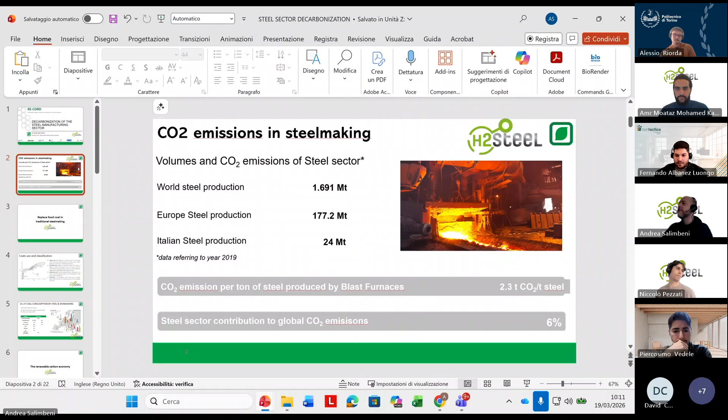Thanks, Fernando. I'm sharing my presentation. Let me know if you see the first slide in presentation mode. We can see it, but it's not in presentation mode. Okay. No? Can you see it moving, but not in presentation mode? Exactly, yeah. Just a second. Now? Yeah, still the same. Okay, now.

Yes, okay, perfect, great. So this is an introduction to the objective of the H2STEEL project, which is decarbonizing the steel sector. But it wants to be a very general lecture about the steel sector and how to decarbonize it, what are the main barriers. The intensive emission of CO2 derived from steelmaking is mainly related to the traditional steelmaking process, the one using blast furnaces and lots of coke and fossil coal used as reducing agent for transforming iron ore into iron metal.

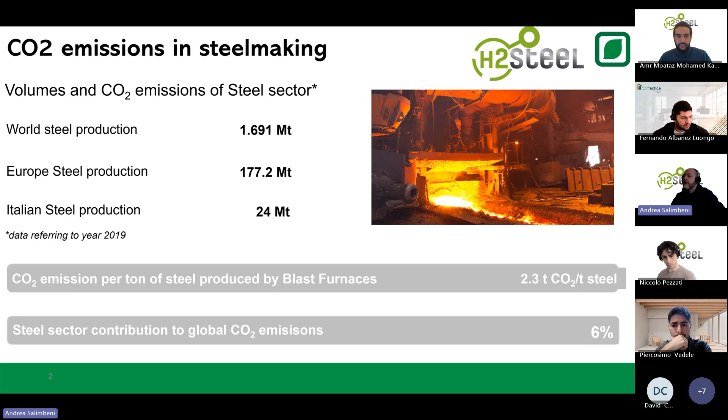So the average CO2 emission per ton of steel, which is in the range of 2.3 tons of CO2 per ton of steel, is mainly related to the traditional ironmaking and steelmaking process, where iron ore is injected together with coke in the tall blast furnaces to produce pig iron. Then we will see that there are already solutions and processes with lower carbon footprint, but they are still emerging and they do not fully avoid CO2 emission. So the primary source of CO2 in the steelmaking process is due to the use and consumption of fossil coal.

Fossil coal can be of different quality, and the Van Krevelen diagram is the best way to summarize different characteristics and quality of fossil coals. We go from the anthracite, so the highest rank coal, low volatile, high carbon, to the bituminous coal, this area, which is including coals of even higher volatility, up to the lignite class.

Lignite and peat represent fossil carbon sources which have not finalized the carbonification process, and that is why they are still volatile and not considered anymore as coal. So all these coals are used in the steelmaking process, but the coal and the anthracite are those really used. Anthracite is used mainly in the sintering process and as PCI. The coal is used both as a fuel and as a source of coke.

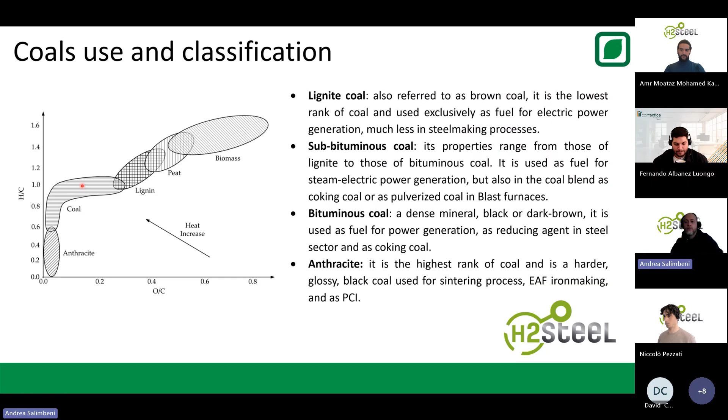Coking is the process where coal is pyrolyzed at 900 degrees to produce a particular high strength, low volatile coal material to be used in blast furnaces. So these are the coals that we need to replace if we want to decarbonize the steel sector. Just to give some idea, we did some studies based on literature and on Euracoal statistics.

The crude steel produced is in the range of 136 million tons per year in Europe. The total coal consumption is in the range of 56-60 million tons per year. As you can see, this column describes the traditional process and the new electric arc furnace based process.

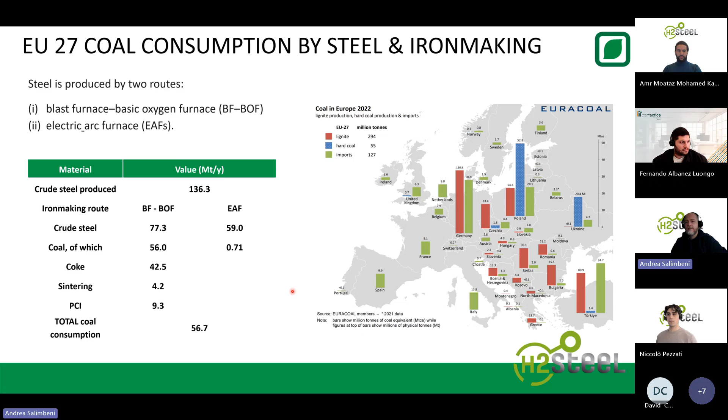The traditional process is the iron and steelmaking route, where the iron ore, so the mineral, is processed in blast furnaces with the consumption of coke and coal as a fuel to produce pig iron. And this is consuming most of the coal of the steel sector. The electric arc furnaces are used mainly to recycle steel scrap, so the consumption of coal is much less. But anyhow, we have as a target likely 50 million tons per year of coal to replace.

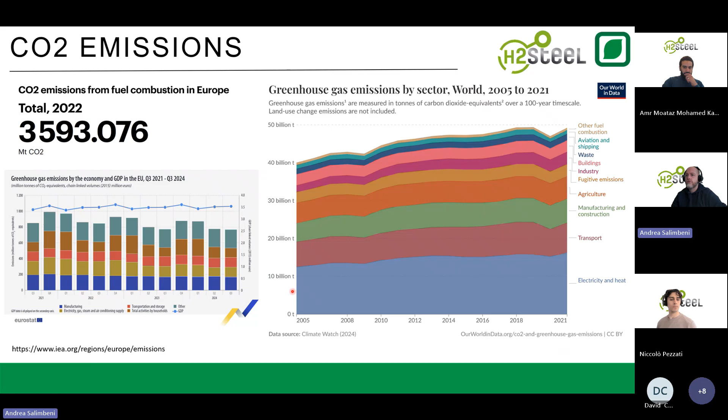Why do we need to replace that? Professor Chiaramonti already mentioned that, so I will go quite quickly. We have about 3 billion tons of CO2 emitted in Europe, and the steel sector and the industry sector are responsible for quite a lot of this share.

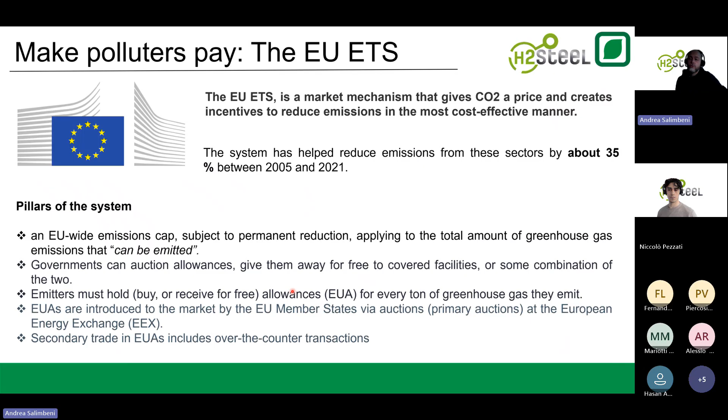Fortunately, we have a system named ETS, which is putting a price on CO2 in the form of credits to buy. So companies like steel companies have to buy CO2 certificates issued by the ETS program every year, and they have to buy 1 certificate per ton of CO2 they emit. Nowadays the price, this was last 2025, was in the range of 71 euro per ton. On average, we can say now it's in the range of 80, and we are going towards 100 in the next years.

Just to give an idea, the ETS generated about 43 billion euro revenues only in 2023, and we expect to generate even more in the next years when it will be extended to more sectors. Of course, this price on CO2 represents an issue for steel companies, as they have to pay likely an additional tax on their production process.

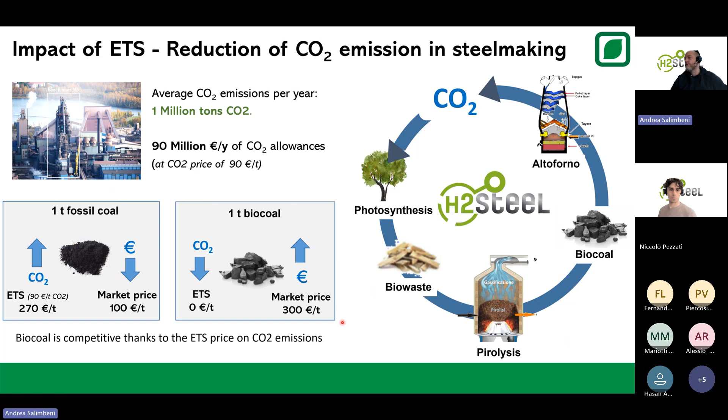And that is why biocoal compared to fossil coal can be a solution. Because if we replace fossil coal with biocoal, probably we can reduce the CO2 emission, and for companies, we can reduce the amount of certificates to buy. So the ETS is the way we have to make biocoal competitive with fossil coal. And basically the target of this project is to produce bio-based reducing agents for the steel sector to improve the economics and the sustainability.

So, as I was saying before, we have a traditional steelmaking and a more modern steelmaking process. Traditional steelmaking means we consume coal for everything. We have the blast furnace, which is our pig iron production unit. How the blast furnace works I will explain later, but just to give you an idea,

the consumption of coal is in the range of 700 kilo per ton of steel or hot metal produced, distributed as follows: the coke oven to produce coke, the pulverized coal to be injected, and the sintering process, which is needed to transform the mineral, the iron ore, into a feedstock suitable for the blast furnace.

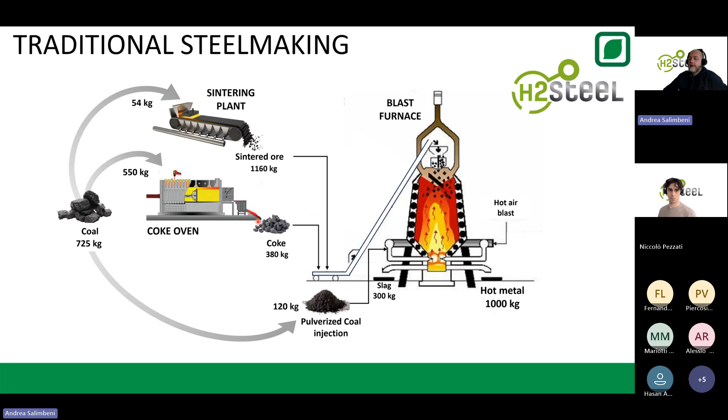So in a blast furnace, the consumption of coke is in the range of 300-350 kilo per ton of hot metal, while the coal injected as pulverized coal is in the range of 120 kilo per ton of hot metal, which is quite a lot. The pulverized coal injected has the role of producing CO, so that we enable the reduction of iron ore, iron oxide, into iron metal and CO2.

The coke has a double role of producing CO while gasifying, but also to maintain a porous layer between the iron ore which is injected in the furnace, so that the gas can pass through and the production of gas can enable the reduction of iron ore into iron.

To do that, the coal used is considered high quality coal, where the volatiles are quite low, between 10 and 20%, and the carbon content of the coal should be high. Between 65 and 80% is something that is acceptable. These are examples of coals commonly used in blast furnaces. These are the coals that we have to replace.

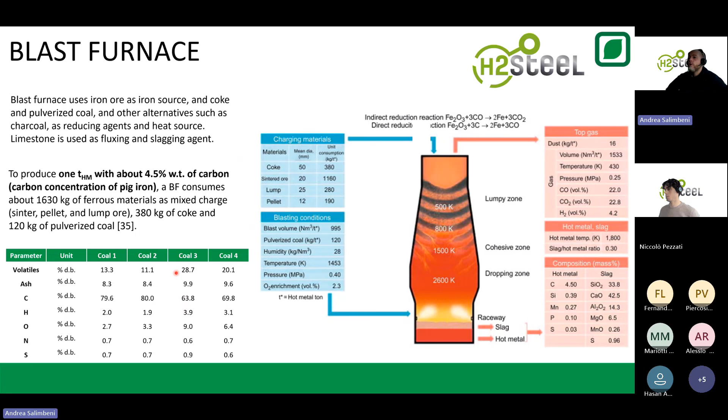The coke oven, I will be quick here, is a pyrolyzer of coal. In these reactors, the fossil coal, in particular vitrinite, is processed at 900 degrees for likely 19 or 24 hours in almost absence of oxygen. These are the chambers where the coal is charged, and these are the chambers where heat is produced by burning the gas.

In this case, at these conditions, the specific coking coal like vitrinite and liptinite becomes fluid and degrades, producing a highly porous, really strong carbon-rich material, which is named coke, which presents much more structural properties and compression strength and resistance than fossil coal. So these are the compositions of the coal used in a mixture to produce coke. As you can see, volatiles are higher compared to those of the coal used for injection.

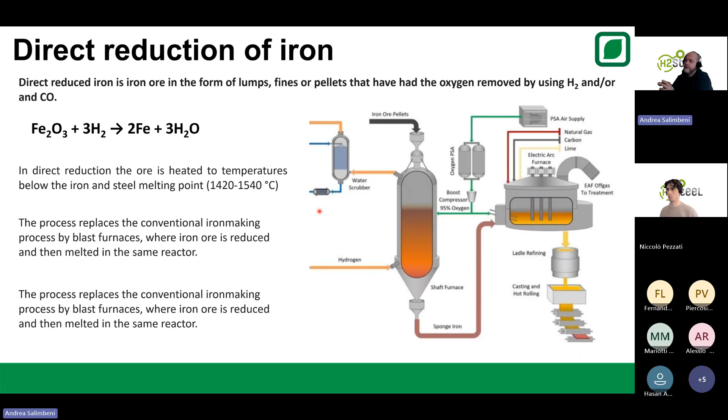And that is why after being reduced as a metal, it can go to the melting furnace, which is an electric arc or a submerged arc furnace, where the carbon is also added to produce the steel. That is the difference. So direct reduction of iron means decoupling the iron reduction from the iron melting, and it enables reducing the emissions, in particular when hydrogen is used. This is one of the last points.

Electric arc furnaces are used when the iron is already a metal. So they can be used with iron metal from direct reduction, or to remelt the steel scrap. The process is simple. An electric arc is used to give the energy to melt the material, the scrap or the reduced iron is melted, and the carbon, the coal, is added to adjust the carbon content in the hot metal, because it's always important to remember steel is an alloy of carbon and iron.

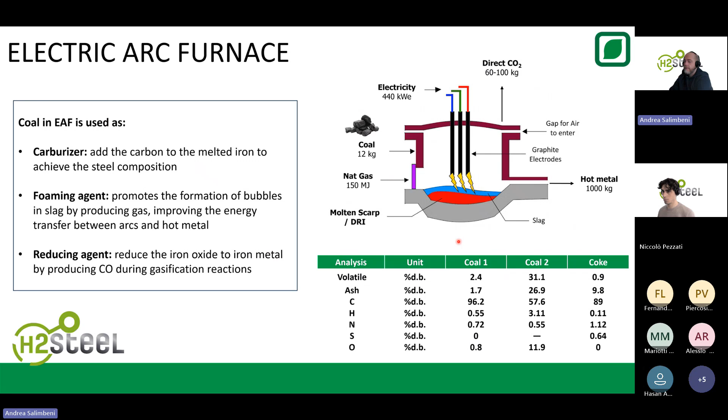And that is an example of the quality of the coal used in electric arc furnaces. It can be more or less volatile based on the specific target and the specific quality of the steel that we want to produce. So, what is the target? We need to produce a coal with reliable quality to replace the fossil one. So we have to produce something of low volatile content, high carbon content, and in particular, we need to avoid contaminants that are critical for the steel quality, like phosphorus, potassium, sodium, and sulfur.

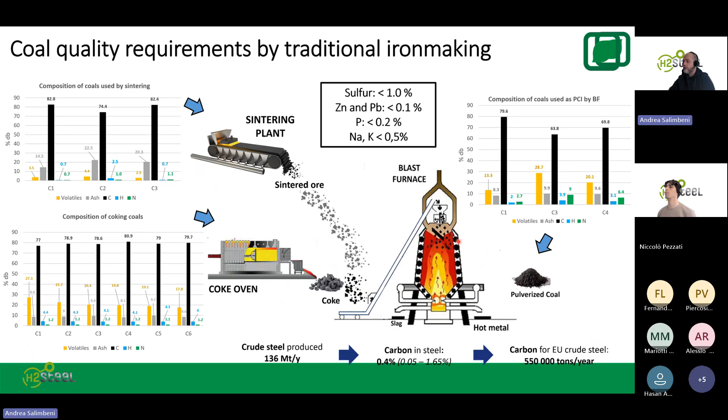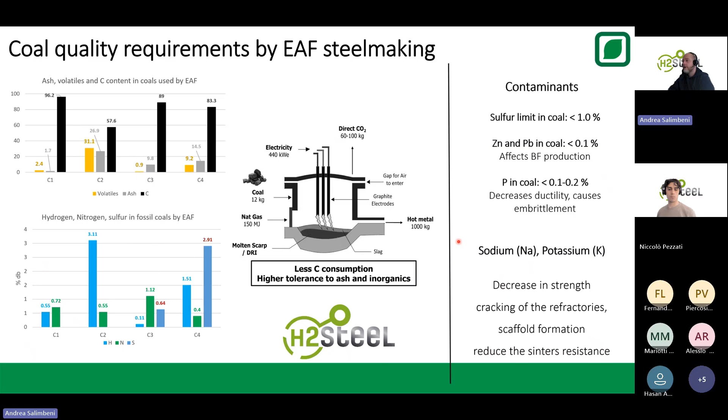That is our target. Do we want to decarbonize the steel sector? If we want to do that, we need to introduce new reducing agents like hydrogen and bio-based coal. And that is what H2STEEL is doing. Regarding the electric arc furnaces, the limits are the same. If we want high quality steel, we need to produce a coal alternative with low volatile, high carbon, and low contaminants: low sulfur, low phosphorus, low zinc, low lead.

So both in traditional steelmaking and in electric arc furnaces, carbon must be injected in different quantities, but it is needed as a carbon source in the alloy, in the steel. In traditional steelmaking, the blast furnace is equipment that cannot avoid much of the emission of CO2 because it cannot be integrated directly with hydrogen as a reducing agent, or only partially.

So biocoal can replace fossil coal in the coking process at a maximum of 15%, as a pulverized coal at 100%, and in sintering process the same. In electric arc furnaces, biocoal as well as the fossil coal can be used as 100% alternative as carburizer, as reducing agents, and as foaming agents.

So the conclusion of this presentation is we can replace fossil coal with biocoal. We can produce green hydrogen to be used in the DRI, and that is what H2STEEL is trying to do: combine the production of green hydrogen and biocoal for the steel sector.

Oh, great. So now I will really briefly introduce one of the technologies of the H2STEEL project, that is the methane catalytic pyrolysis or cracking or decomposition, different names for, at the end, the same reaction, with the goal of producing hydrogen and solid carbon. But before entering into the H2STEEL topics, let's do a brief theoretical lesson about the thermodynamics of the process and also the different kinds of technologies. So first of all, the thermodynamics behind the methane cracking.

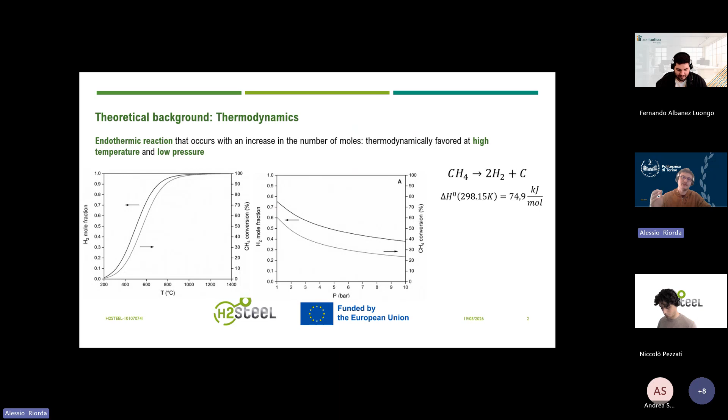And the second point is that during the reaction, we have also an increase of the moles, because you are going from 1 mole of methane up to 2 moles of hydrogen, so you are increasing the volume. It means that, of course, the pressure is avoiding the expansion of the gases. So if you have a higher pressure, your conversion will be lower. And this is clearly represented in the second plot of the slide, where with the higher pressure, you have a lower conversion. So, summarizing, we need to have higher temperature and lower pressure to have a good methane cracking reaction.

So which are instead the technologies that we can use to do that? First of all, we can divide the technologies into non-catalytic and catalytic cracking. With non-catalytic, of course, we have, as I said, to give the methane the energy to crack into hydrogen and solid carbon. And you can do it in a thermal way, just burning something, or electrical heating to heat up the methane and then crack the molecule. Or you can do that with other technologies like microwave or plasma. But these are just based on the thermal action, so the heat that you're giving to the material.

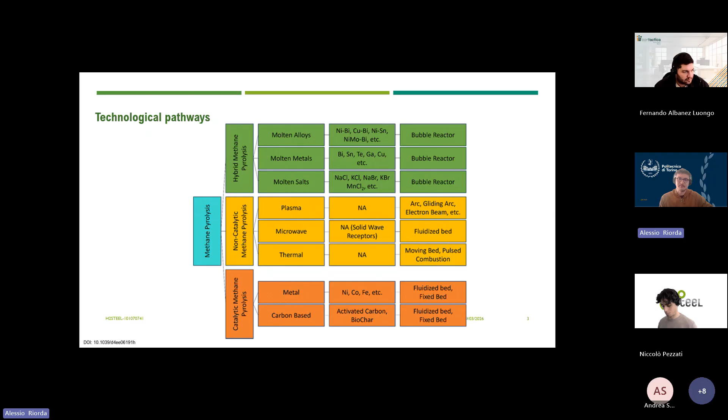Instead, if you want to use a catalytic process, you can use a catalyst to reduce the temperature needed for the cracking. In that case, you can use different kinds of catalysts, like metal catalysts, nickel, cobalt, iron, or a carbon-based catalyst, but we will see that later. Then there are also hybrid processes like molten metals or salts that have both actions, but these are not part of the presentation. Focusing on the catalytic cracking, as you can see here, you can have different metals. The most used in literature are iron, cobalt, and nickel. And you have also here an overview of the prices of the materials.

But the most important part is the first plot, where is represented the temperature range in which each of these catalysts or processes can work. For example, for the non-catalytic reaction, as I said, you need higher temperatures, going from 1,000 to over 1,600. Instead, if you're using a catalyst like carbon, iron, cobalt, you can decrease the temperature and obtain the same results. For example, the carbon one can work between 800 and 1,000, and nickel is the one with the lowest temperature because it's more efficient in the conversion, but at the same time it can have problems with temperature like sintering or something like that.

In the other two graphs that you can see here, that represented the conversion dependent on the temperature and also the stability of the catalyst. This is another good point that we will discuss in the next slide.

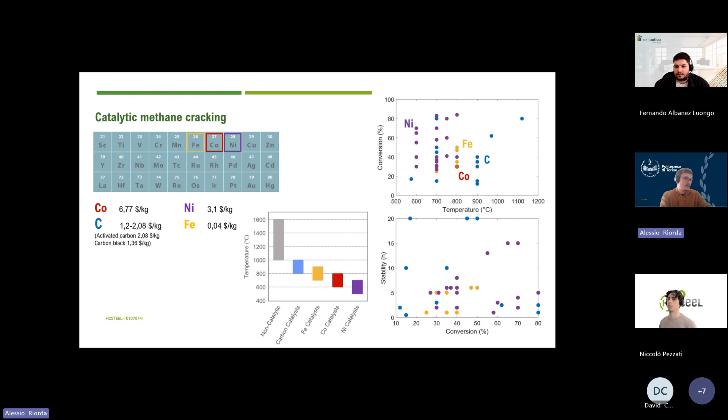Why? Because, as I said, the reaction is breaking the methane into gaseous hydrogen and solid carbon. And the solid carbon has to go somewhere. In this case, if you are doing a catalytic reaction, the solid carbon is depositing on the catalyst. And this is the process that leads to the deactivation of the catalyst, because when it's covered with solid carbon it is not working anymore as a catalyst.

This is not something new. The petrochemical industry has known that for a lot of years. Indeed, normally in the catalytic processes, like for the production of more gasoline from higher molecules of hydrocarbons, they normally burn off the carbon. So they take the catalyst, they burn off the carbon, and then it's regenerated and it can work again.

In this case, we don't want to do that, because the carbon that we are depositing on the catalyst can have a high value, and we can just use it and commercialize it. That's the point of the technology of methane cracking.

But which kind of carbon are we depositing? It strongly depends on the characteristics of the process. So it depends on if you're working with a catalyst or a thermal process, and if you're working with a catalyst, which kind of catalyst. For example, we have different kinds of carbon, like carbon black, just really small particles of carbon, or carbon nanotubes.

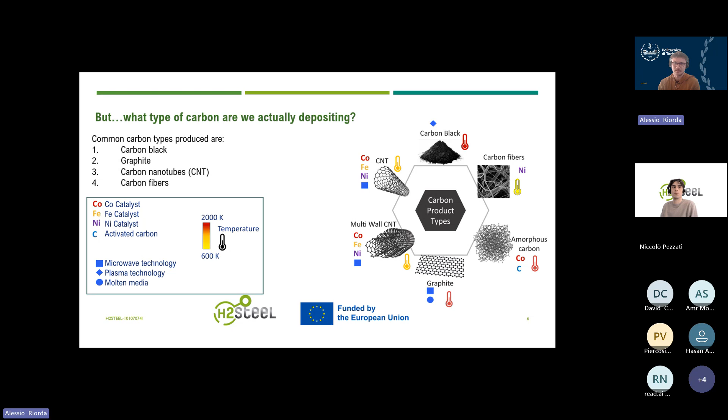So these tubes of carbon are generated normally with metal catalysts, because we have the deposition of the carbon on the catalyst, then the migration of the carbon inside the catalyst, and then deposition at the contact with the support, which generates these beautiful carbon nanotubes or fibers. And also the temperature is helping the generation of one of these types of carbon deposited.

But another question that you can think about is, okay, but is there demand for all of this carbon? Here, just a brief example. We had more or less in 2023, 97 million tons of hydrogen demand worldwide. And if we think about producing this hydrogen with the methane cracking process, we will need 386 million tons of methane. That's okay, but then we will produce 289 million tons of carbon. That's a lot, of course.

But how much? If you see the graph here, you can notice that the produced carbon compared to the demand for carbon nanotubes, carbon fibers, or carbon black is really high. So the result of this simple example is just to say, okay, maybe we cannot produce all the hydrogen with this process, but it can be part of the solution.

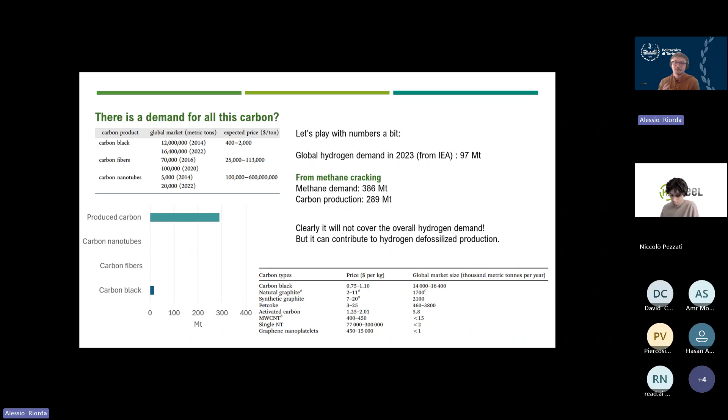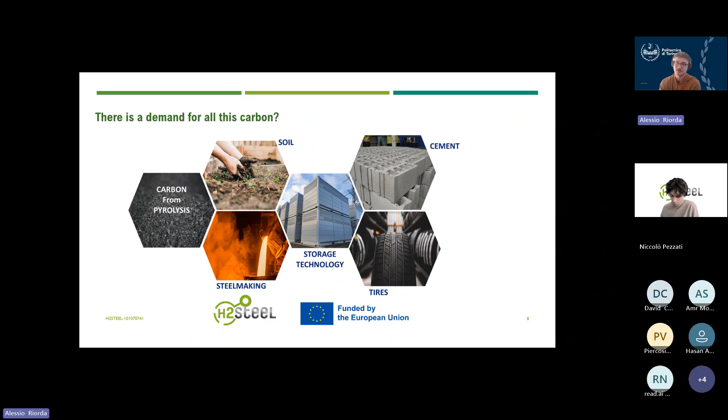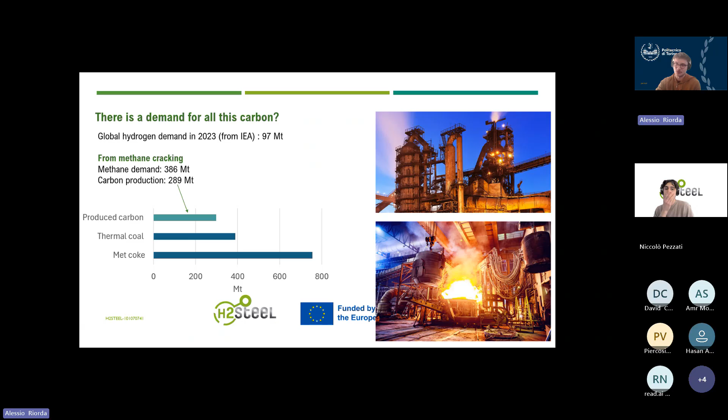Of course, it depends strongly on the type of carbon that you need and what we can put in these industrial processes. But it's just to say that carbon nanotubes and so on are not the only demand for carbon that we have in industry.

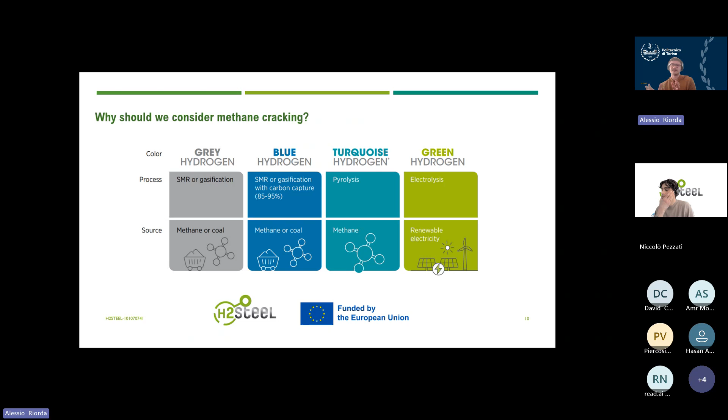And just to conclude, let's see a comparison between different hydrogen production routes. Here you can see some of them. Normally gray hydrogen is produced with steam methane reforming. And the point of this slide is to say, okay, for producing 1 kilogram of hydrogen, you will need 2 kilograms of methane. And the energy requirement will be 6 kilowatt-hours per kilogram of hydrogen produced.

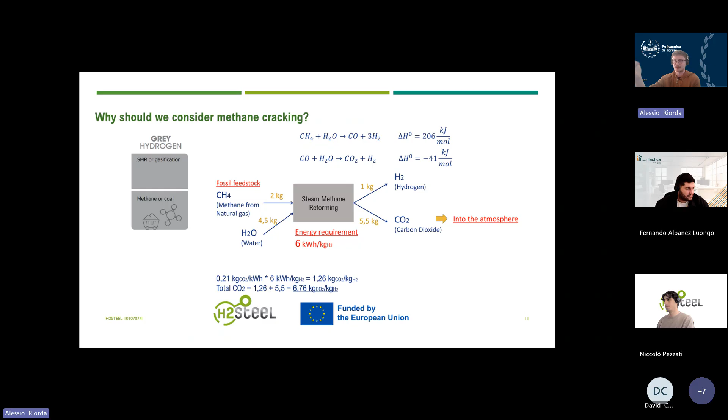And this will lead to CO2 emissions, not only the ones related to the energy requirement, but also because we have carbon in the feedstock, and so you will transform it, of course, into CO2 that goes into the atmosphere. One solution that we can see today is water electrolysis.

That is, of course, an interesting solution, because we are starting from a non-carbon feedstock, and you can obtain 1 kilogram of hydrogen from more or less 9 kilograms of water. It will require a lot of energy, and if this energy is not from renewables, that will lead again to the emission of a good amount of CO2, as you can see at the end of this slide.

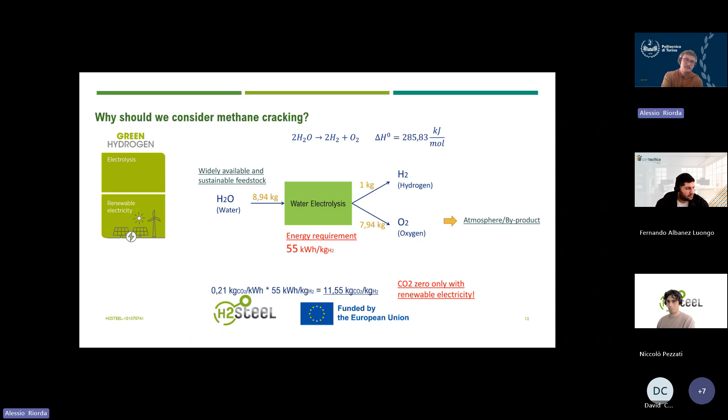But if it's completely renewable, you can decrease this CO2 amount to zero. Are there any other solutions? Yes, the one that I presented now is an interesting one, because differently from steam methane reforming, you are starting from more methane, 4 kilograms for every kilo of hydrogen, but then the carbon that you are producing is not in a CO2 form, is not going into the atmosphere, and you do not require technology to separate it and then put it somewhere.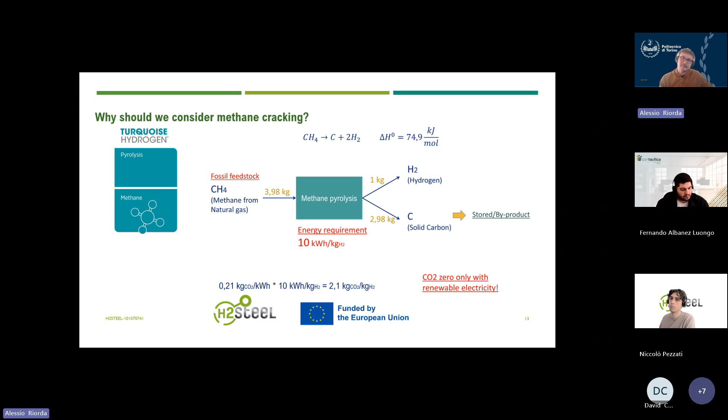You have just solid carbon, and you can store it or use it as a byproduct, as we said before. The energy requirement is lower than electrolysis, and if you again use just renewable electricity, you can decrease to zero the CO2 emission from this kind of technology. So this is just an overview of why we are talking about methane cracking, and later my colleagues will show you a more specific discussion about what we are working on in H2STEEL.

So without further ado, I will go deeper into the fantastic world of catalytic methane pyrolysis through carbon-based catalysts. Alessio was really complete in his presentation, so I will move really fast in this part. Nowadays, hydrogen is mainly produced through steam methane reforming, which is the most pollutant technique, but at the same time the cheapest one. The demand of hydrogen will progressively increase over the next 25 years in all the scenarios. At the same time, we will have a decrease in the request of hydrogen produced through steam methane reforming. Water electrolysis could represent only a long-term solution, because the energetic cost is really high.

For this reason, a mid-term solution could be represented by methane decomposition, which consists in the decomposition of the methane molecule into solid carbon and gaseous hydrogen. The main advantages of this process are the production of highly pure hydrogen, which of course depends also on the conversion of the reaction, the absence of CO2 removal stages, and an easy way to store the carbon produced. The main disadvantages are related to the high stability of the methane molecule. It is an endothermic reaction requiring high temperatures and high energetic demand, and it has a lower hydrogen to methane yield compared to state-of-the-art competitors, like steam methane reforming.

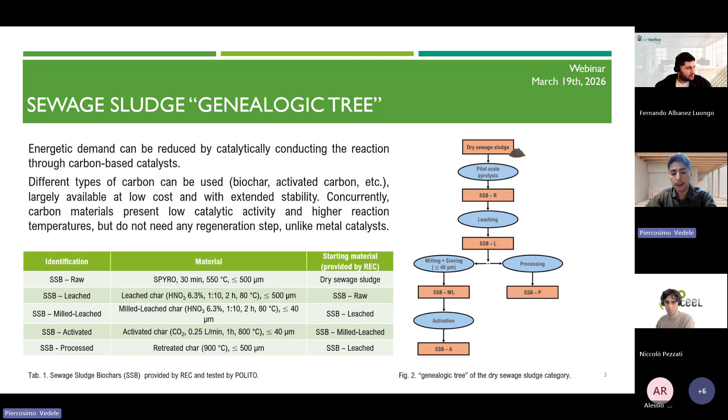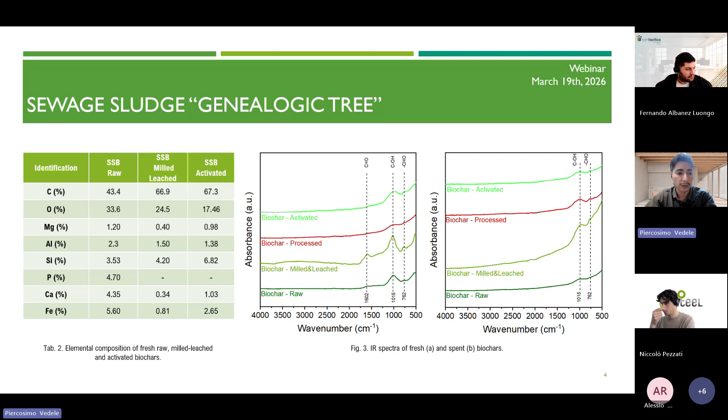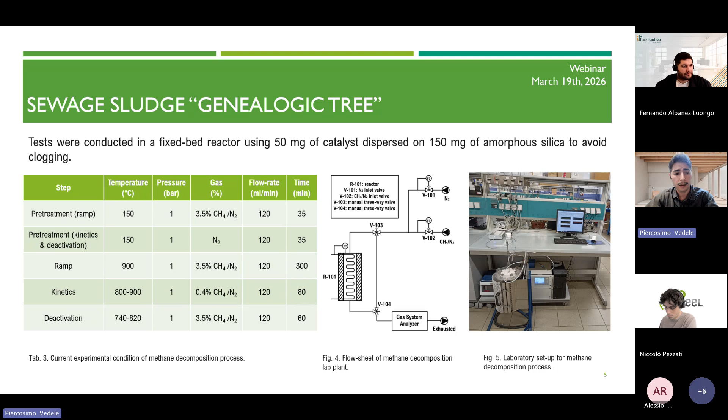But let's go deeper into the test phase. On the right, you can see the lab test bench that we use for conducting our tests. All the tests were conducted in a fixed bed using a fixed amount of catalyst and a fixed amount of an inert, amorphous silica, to avoid clogging of the reactor caused by carbon deposition. We can conduct three different kinds of tests: a ramp test to evaluate the best of the 5 biochars we are considering, so a screening of the biochars, and kinetic and deactivation tests to get the kinetic and deactivation parameters. All the tests were preceded by a pretreatment phase to ensure the dehumidification of the catalyst.

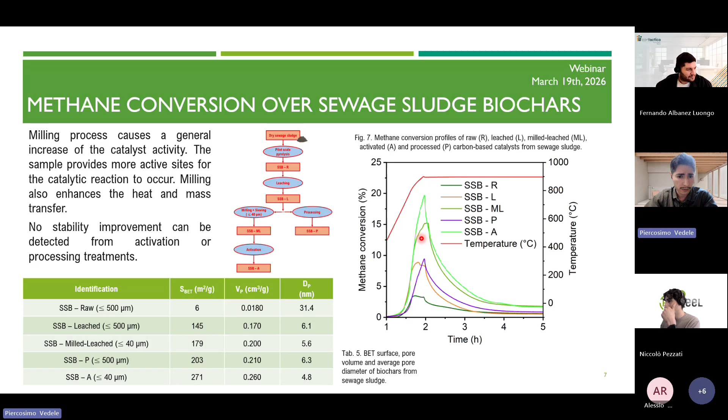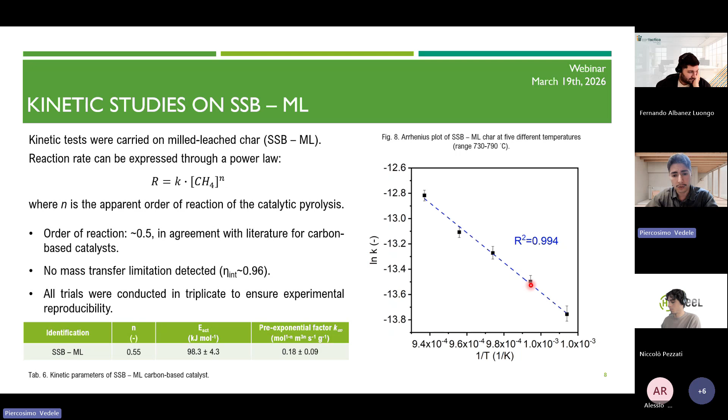And in particular, I want to point out that all the tests were conducted at low temperature for two important reasons. The first is that we want to ensure a gradient-less system, which works in all its length in the same way, and at the same time we want to skip the mass transfer limitation of the system.

And the same thing was done also for the deactivation studies, which were conducted at low temperature, again to ensure that we are in a kinetic regime. We used this kind of equation to fit the activity of our catalyst all along the time, activity which depends on the deactivation constant, Kd, m, which represents the dependence of the activity on the methane concentration, and D, which represents the order of the deactivation.

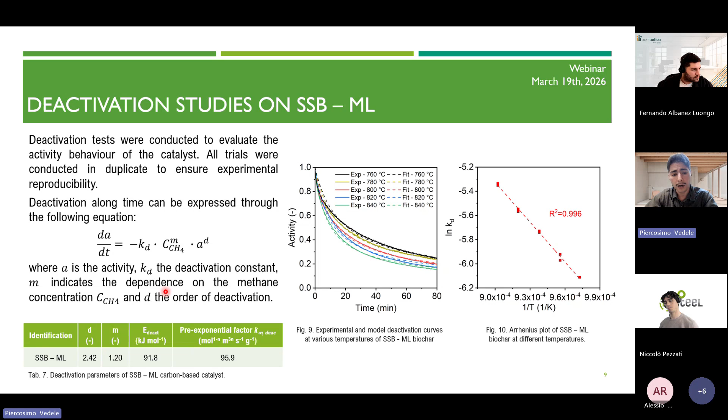All the tests again were conducted in duplo in order to ensure the experimental reproducibility, and in this way we were able to get the activation energy of the deactivation, which is close to 92, which is really close to that of reaction, and it indicates that the deactivation of this kind of carbon-based catalyst depends only on the amount of carbon deposited on our catalyst, and not on the quality of the carbon deposited.

These kinds of results were useful for the modeling of our fixed bed reactor. By solving through MATLAB this partial differential equation, we were able to get the profile of the methane conversion all along the time and all along the length of our reactor.

Here you can see the main characteristics of the reactor, and from here you can see that our model is able to fit quite well the experimental results that we obtained from our test conducted at 820 Celsius degrees. Of course, the model takes into account also the change in density and the change in particle size,

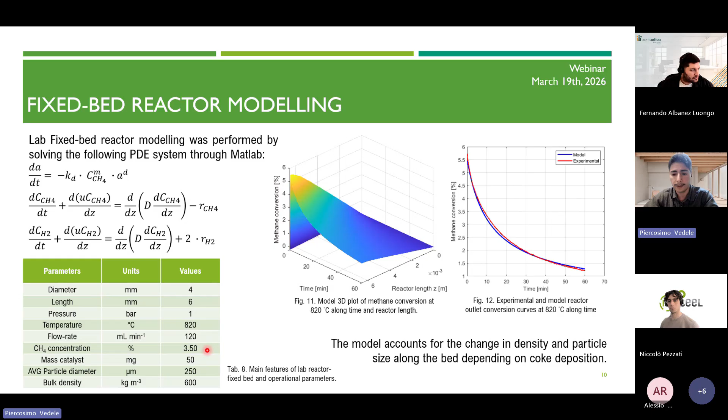which is related to the deposition of the carbon, but of course the conversions are really small, and also the methane concentration is really small, so the amount of carbon deposited is low, and we don't have a huge change in density and particle size, but it is taken into account.

Those results were useful also for a simulation of a new kind of reactor for conducting this kind of reaction, a moving bed, where gas and solid are sent to the reactor countercurrently.

Here I only show a sensitivity study where you can see that by changing the residence time of the catalyst inside our reactor, we were able to reach different kinds of conversion. Of course, by increasing the catalyst residence time, we are reducing the methane conversion, because the catalyst is characterized by lower activities, but at the same time we are also increasing the amount of carbon deposited on the catalyst itself. Maybe here you can see this reasoning better.

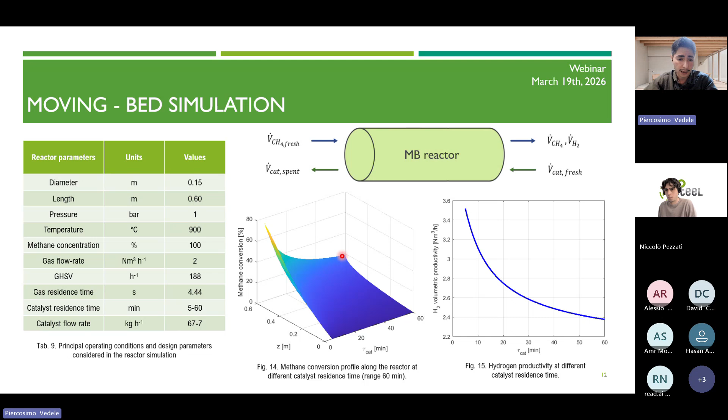So at low catalyst residence time, we have higher conversion, but of course this kind of reactor characterized by really low residence time is not so easy to manage. By increasing the catalyst residence time, we are reducing the methane conversion, but we also have a reactor which is easier to manage. Of course, this kind of technical study must be coupled with an economic study to evaluate which is the best trade-off from the point of view of the technical issues and the economic issues.

So, in conclusion, we tested several biochars from the family of the sewage sludge, which were subjected to different upgrading processes. The leaching, the milling and the activation, of course, increase the activity of our catalyst. In particular, the activation only slightly increases the activity of our catalyst. For this reason, we decided to proceed with our further study with the milled leached one, because it represents the best compromise between performance, cost, and environmental impact of the upgrading.

From the kinetic tests, we observe a reaction order and an activation energy which are quite in agreement with those of the literature, and the deactivation energy is close to that of activation energy. That indicates that the deactivation profile is influenced only by the carbon yield, the amount of carbon deposited, and not by the pyrolytic nature of the carbon deposited.

Those results were useful not only to simulate our fixed bed reactor, but also to make a simulation of a moving bed reactor, which represents the best way to scale up this kind of process, and which elucidates the differences in terms of performance depending on the residence time of the catalyst inside our reactor.

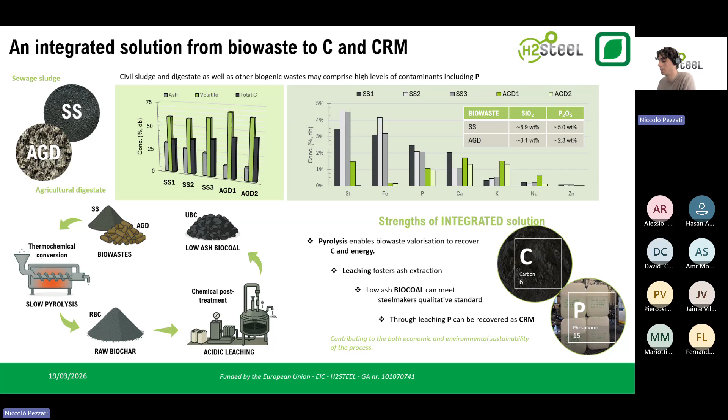So the first stage of this integrated process is the slow pyrolysis that we carried out at a pilot scale here at RE-CORD, and for which we have first optimized the conversion conditions at a laboratory scale, and afterwards we have replicated those in the pilot unit. So the parameters that we have focused on are temperature, the residence time, and the heating rate of the conversion chamber.

So we have converted both the biowaste streams at 550 degrees Celsius with a residence time in the conversion chamber not overcoming 1 hour, and fixed heating rates of 20 degrees Celsius per minute, which is typical for slow pyrolysis processes.

The output of this conversion, of course, is focusing on the yields on the solid products, so the raw biochar, which we can obtain from the thermochemical conversion. And as you can see here, when processing the sewage sludge, the solid yield is slightly higher than when processing the agricultural digestate. So we have 51% solid yield against 39% solid yield, as you can see in the pie charts.

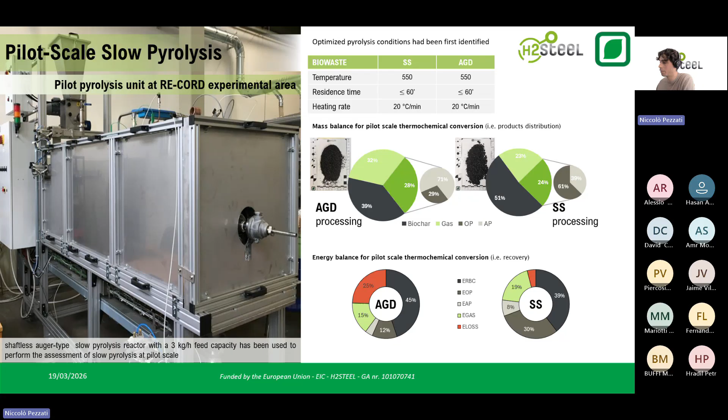So the two biochars that were produced, as I have just described, were also characterized. And here I want to draw the attention to the key aspects of the slow pyrolysis outputs. So first of all, the thermal treatment allows to reduce the volatile matter in the solids, going below the 20% threshold, so we can eventually see a 16% volatile matter content in the raw biochar from the sewage sludge, and a 13% volatile content in the raw biochar from the agricultural digestate.

The most relevant aspect here, though, is the increase of the ash content. In particular, in the case of processing the sewage sludge, we almost touch 60% ash content in the raw biochar, which is a shortcoming of this first stage, but which we can fix later through the chemical leaching.

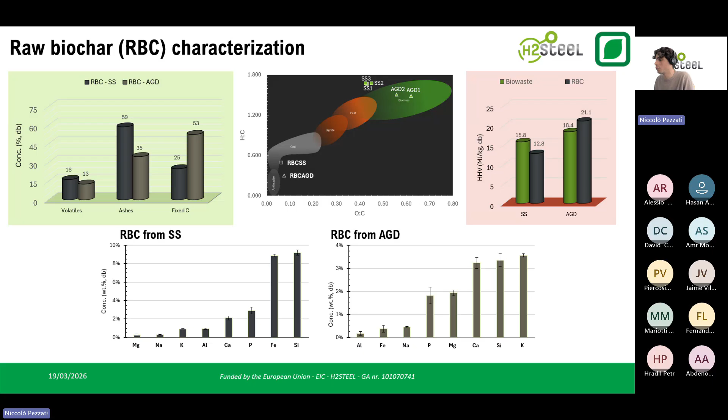And also here I reported the characterization, so the elemental profile of the two biochars. So focusing on the silicon, the phosphorus, the iron, which particularly in the case of the treatment of the sewage sludge reach very high concentration levels. As you can see, silicon in the raw biochar from the sewage sludge is almost 10%, as well as iron. Phosphorus in both the raw biochars is instead around 2%. And this is important because we want to recover it later.

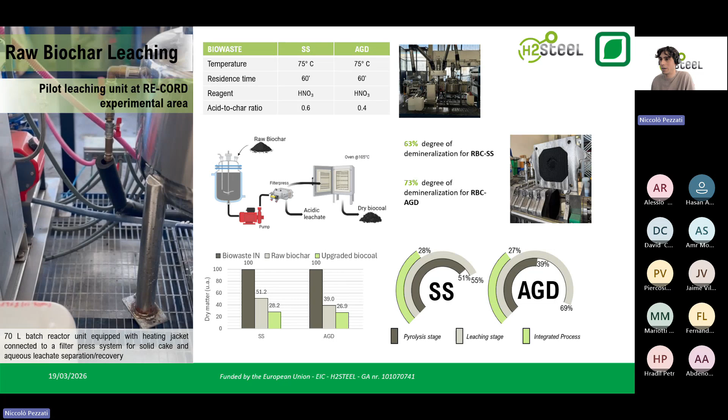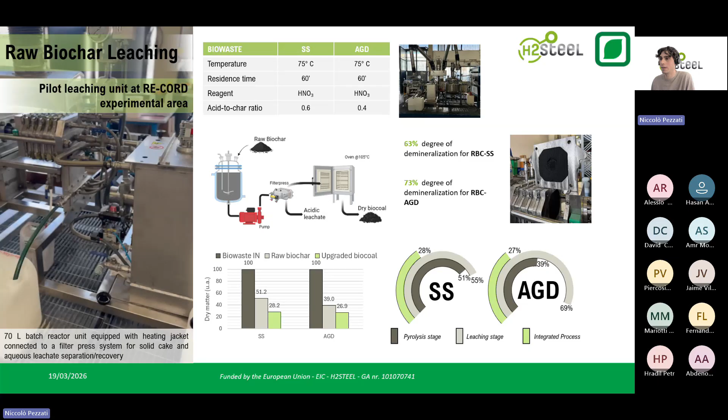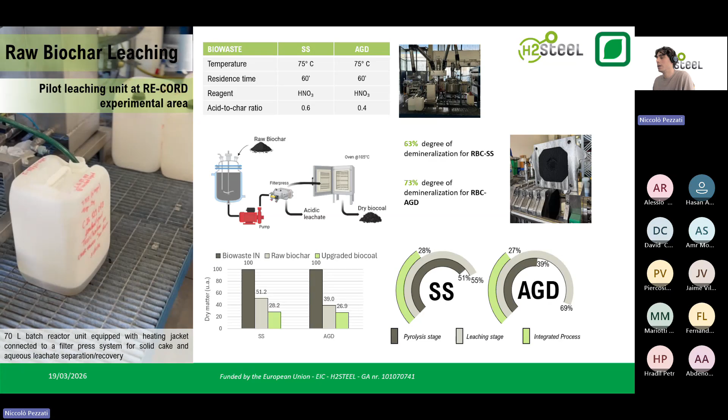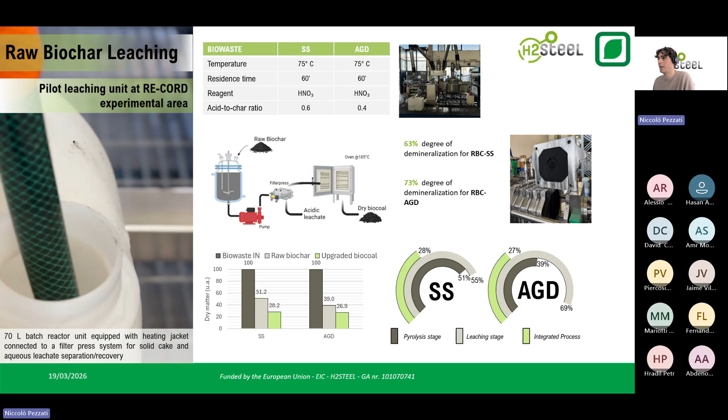So to overcome, as I was saying, the shortcomings of having high ash content in the raw biochar, we created this solution in which we are able to remove the ashes from the solid with the aid of an acidic treatment. The acid reagent that we used is nitric acid. So the treatment, which has been performed on a pilot scale, as you can see here in the clip, is performed at a temperature between 70 and 80 degrees Celsius with a dwell time of 60 minutes and an acid to char ratio which can range between 0.4 and 0.6.

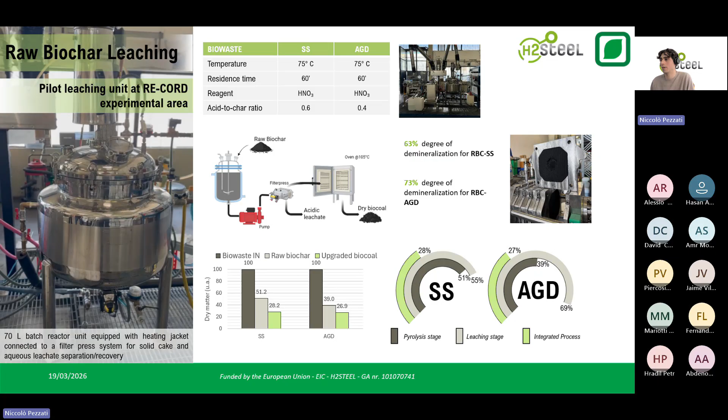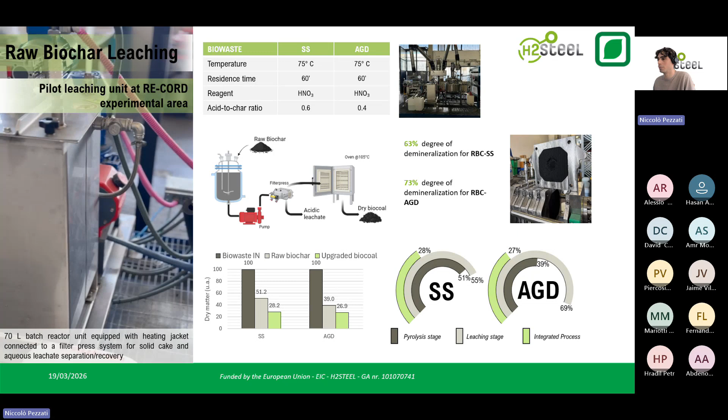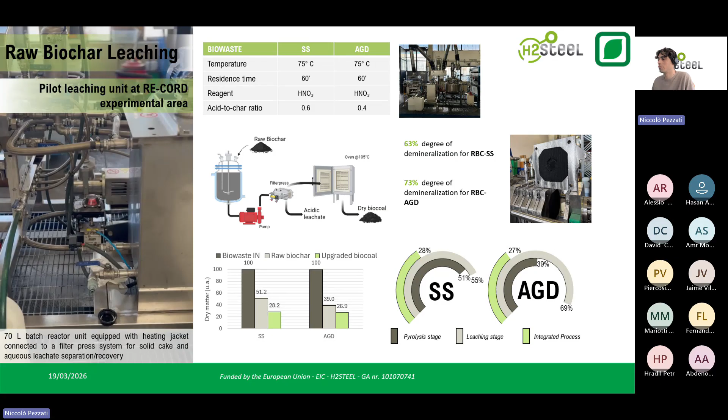And the treatment, as I was saying, allows to extract the inorganic elements from the solid into an aqueous phase. And as I'm reporting here, it is possible to achieve a 63% degree of demineralization when treating the raw biochar from the sewage sludge, whereas this value is even higher, equal to 73%, when treating the raw biochar from the agricultural digestate.

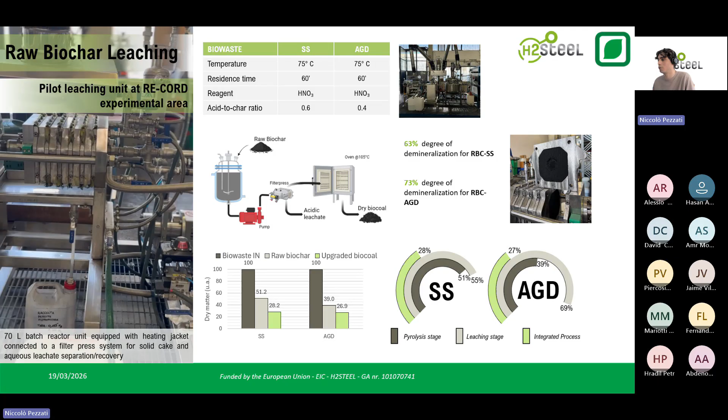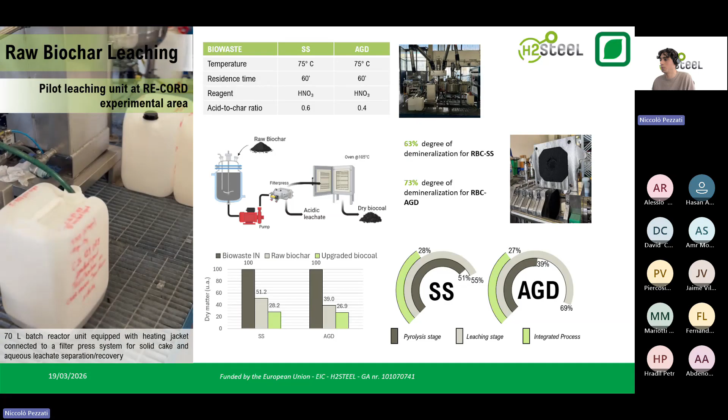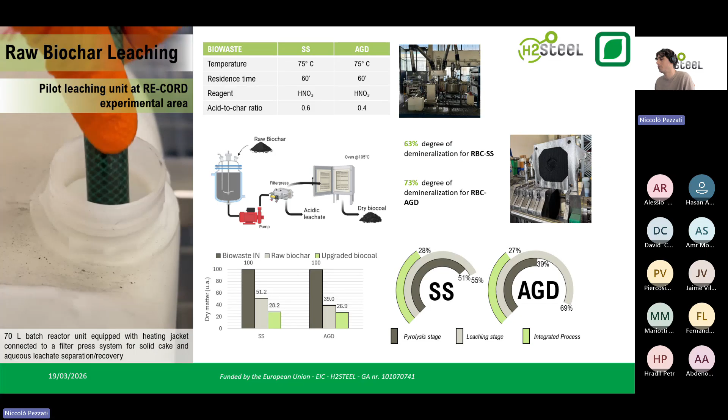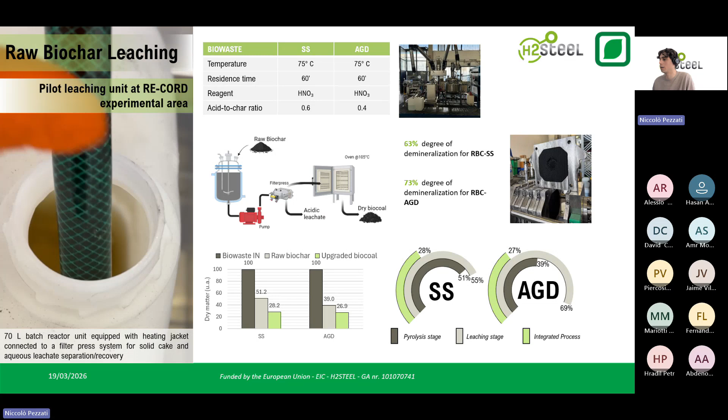And all in all, we have the yields of the integrated process. So first, the pyrolysis stage gives a 51% solid yield when treating the sewage sludge and a 39% solid yield when treating the agricultural digestate. Then the leaching post-treatment has a solid yield of 55% when treating the raw biochar from the sewage sludge and 69% solid yield when treating the raw biochar from the agricultural digestate. And eventually we have respectively a 28% solid yield and a 27% solid yield for the overall process.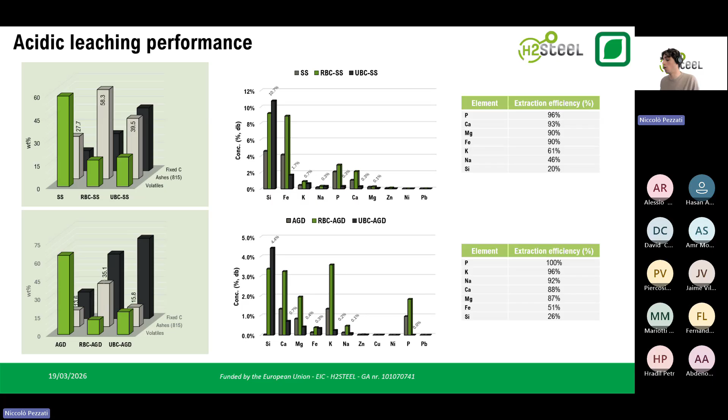And we calculated the efficiency at which we can extract these elements. So we have an idea of the recovery rate of these key elements, and in particular, phosphorus can be recovered at a 96% rate during the treatment of the char from the sewage sludge, whereas it is almost quantitatively recovered during the treatment of the char from the agricultural digestate. So all of this enables to increase the added value of the solution proposed.

So drawing my conclusion, the work that has been carried out here at RE-CORD validated the possibility to scale up this integrated process, validated the slow pyrolysis stage, showing the difference of the solid yields between the sewage sludge and the agricultural digestate, and also the different amount of energy which can be recovered in the products, and later on validated the effectiveness of the post-treatment, which allows to abate the ash content of the raw biochars and remove harmful elements, eventually opening a route for the recovery of a critical raw material such as phosphorus.

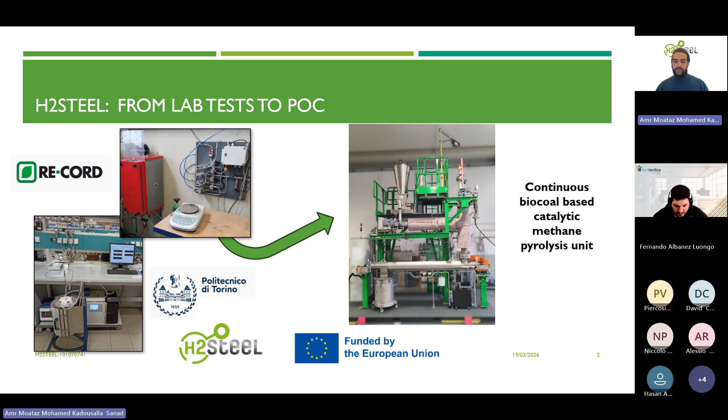Okay. The following is a brief description of the plant, and it is based on a moving bed reactor with a volume of roughly 6.5 liters. It has a total inlet flow rate of 2 normal cubic meters per hour of gas and a solid capacity of 150 liters per experiment.

This catalyst amount is enough to conduct experiments and reach steady state for several hours. The precise number of hours obviously depends on the operating conditions, and it usually is enough to show the stability of the process itself at those given operating conditions.

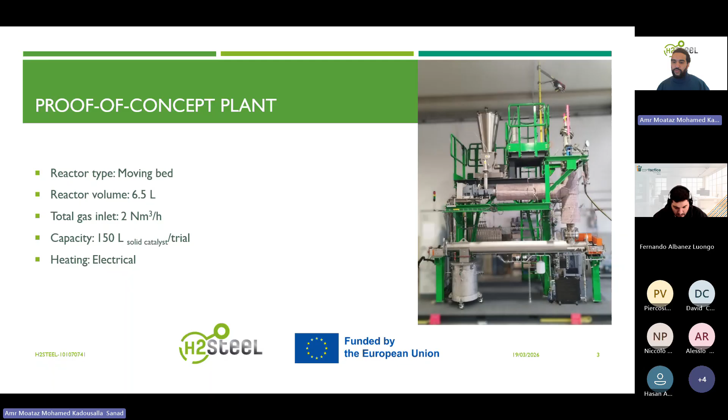There are two separate lines that are divided into 12 functional subunits, as shown in the block flow diagram here. A line that is dedicated for the catalyst, and another is dedicated for the gas, with the reactor acting as the crossroad of both lines.

The catalyst line starts with the catalyst storage at the 150 liters hopper, which is in turn placed over a load cell, allowing for precision monitored feeding from the hopper into the heating screw. The heating screw, as the name suggests, is heated electrically and is used to heat up the catalyst to a temperature up to 900 degrees Celsius.

The catalyst is then moved into the reactor where the interesting stuff happens. And here the gas is also fed into the reactor from the gas feeding line, allowing for the reactions to happen, the necessary reaction for the production of hydrogen and the deposition of carbon. After which the carbon is moved into the cooling and discharging screw.

It's a screw that also controls the cooling of the system, and the gas goes through the gas cooling filtration and then the gas management system, and then later on it goes into the micro GC for gas analysis and further reductions.

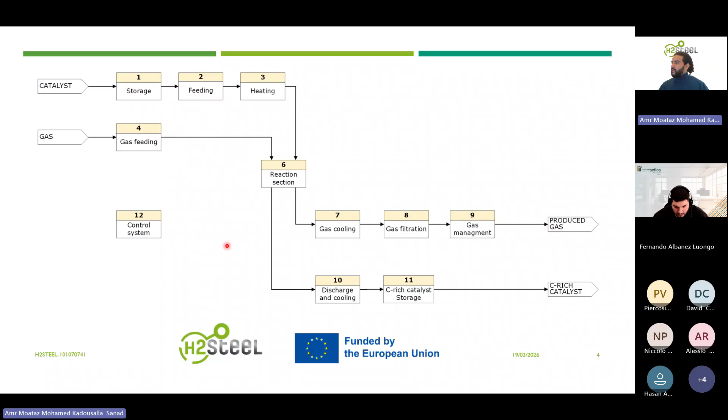Okay, so when we ask, what are the advantages of such a system? Well, first of all, it's a fully monitored unit that allows flexible investigation of various operating conditions that can be adjusted to find the proper trade-off between hydrogen production and catalyst renewal.

Since catalyst is continuously fed for the necessary duration of the experiment, it is continuously renewed as carbon deposits on its surface, causing possible deactivation. Interestingly, though, this deactivation is not seen as a limitation, but rather as a valorization of the catalyst, since the product is then a carbon-rich biocoal instead of a normal standard biocoal.

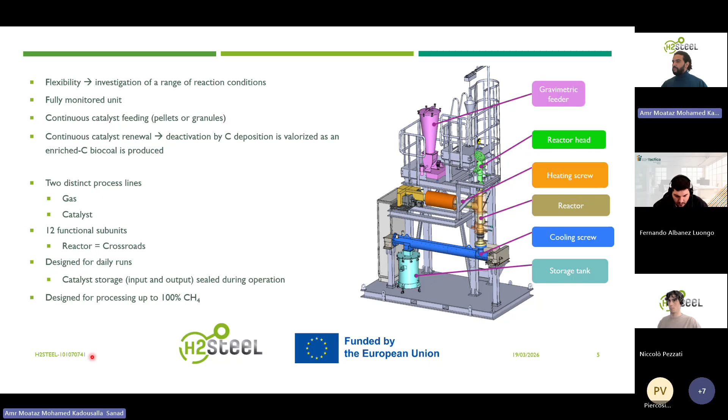Another important feature of this plant is that it is designed to test conditions with up to 100% methane at the inlet, allowing for real-world conditions testing. The continuity of the plant makes it one step closer to demonstrating the possibility of such a process, or its application, on an industrial level.

Okay, and here is a list of the operating conditions and parameters for conducting an experimental investigation in this plant. The list includes all main parameters from catalyst shape and sizing to available reaction volume range and catalyst residence time within the reactor.

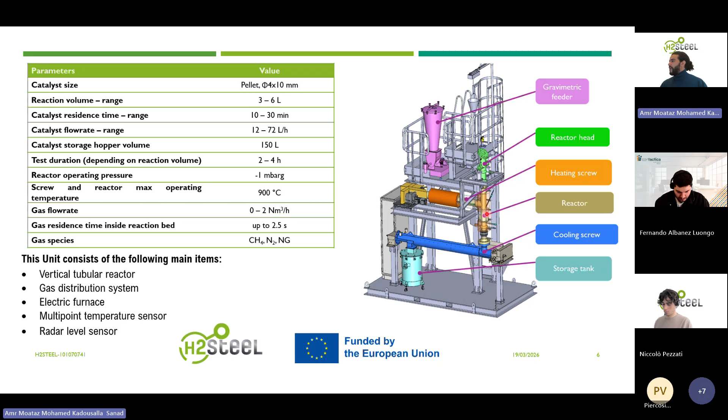As previously mentioned, the plant is designed to operate under up to 2 normal cubic meters per hour of gas at the inlet, which can be either a mix of methane and nitrogen or pure methane, and natural gas can also be used. Here's the hopper we were talking about earlier, the gravimetric feeder, where the catalyst is first charged, then going through the heating screw, then the reactor, and then further to the tank at the end of the line.

So, as for the catalyst preparation, as was mentioned earlier, it starts from the production all the way to the preparation for test. The main preparation steps after the production by pyrolysis require at least 50 kilograms of biocoal in powder form that is dry mixed with 3 to 4% of starch.

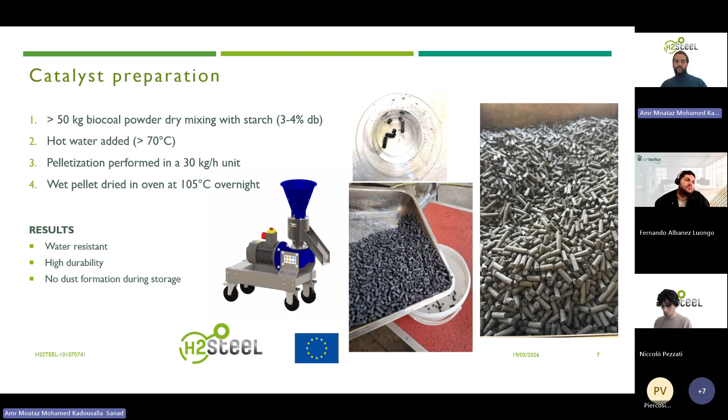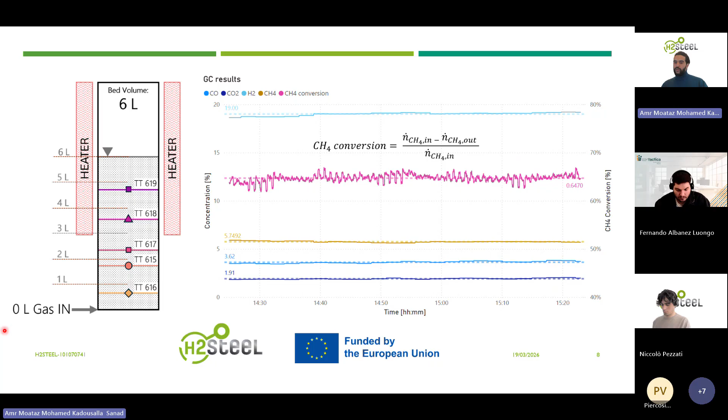From the gas composition at the outlet obtained from the micro GC, we can then calculate what's called the methane conversion, using this equation, which is basically evaluating the percentage of consumed methane with respect to the one at the inlet.